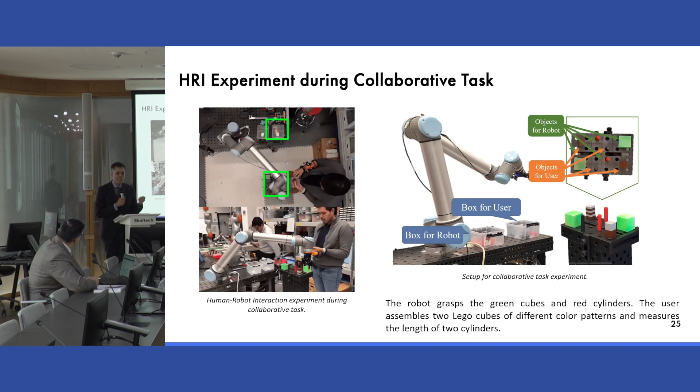So in this case, we achieve the minimal distance - the distance we keep from the robot - increased when we apply haptic feedback by 33.9%, and the time for the entire activity was reduced by 46.3%.

So here you can see in the first part, the robot is moving alone, without the presence of a user, so no collision avoidance activated. In the second part, we don't have haptic feedback, so the collision avoidance is activated in many parts of the operation, and the time of the operation increased by about 100%.

In the last part, we implemented the haptic feedback. When the activation of the collision avoidance algorithm started, the user was informed and could take their hand out. With this system, we achieved a decrease in time of 46.3%.

In the last chapter, we presented the conclusions of our work. The first is about haptic feedback. The first research question was how to improve the design and effectiveness of haptic interfaces for the user's palm during teleoperation. First, we developed a novel method to investigate the sensation rate on the user's palm during interaction with different surfaces, and developed the multi-contact wearable haptic interface for the palm, LinkGlide.

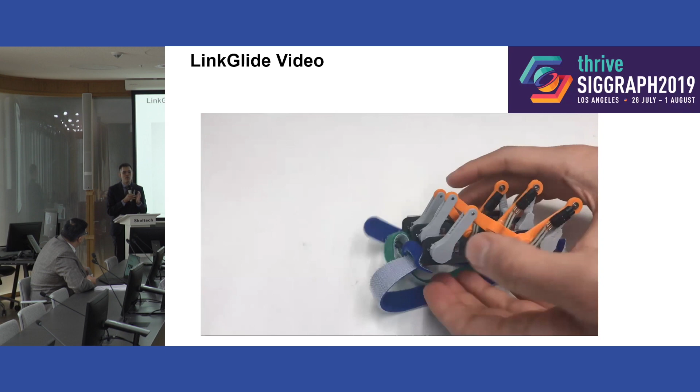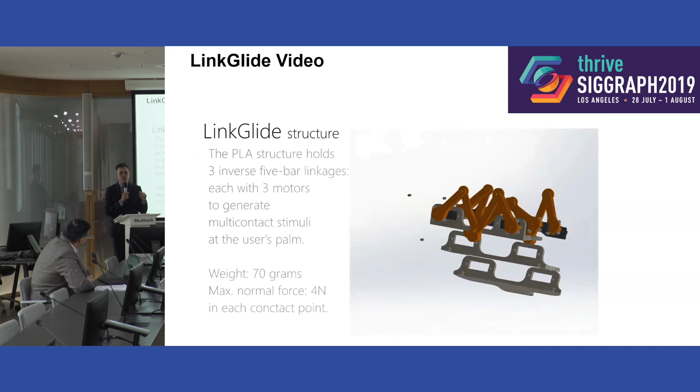Here is one version of the device that the user was wearing. The base is moving a bit to be more comfortable for the users to wear, and after these points give the sensation - in this work we were giving the sensation in virtual reality. So how the users can interact with different points in the palm, it can give the movement. These 3 points are sliding in the palm, giving different positions according to the movement of the servo motors.

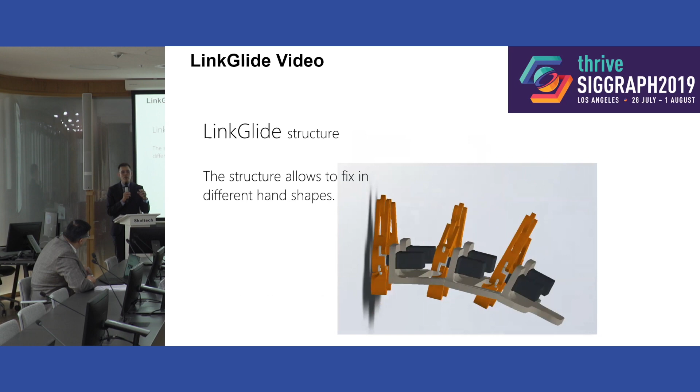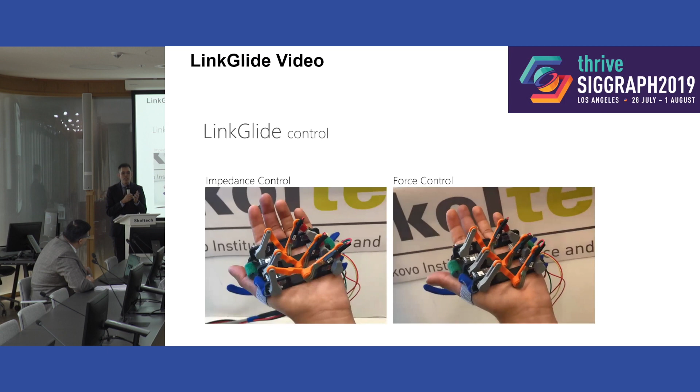I now get why you call it glide - it's not really 3 points, let's call it 3 bands. The point is, we can make these three contact points, and we can slide too, covering almost all the palm of the users. Here we can see how the points are moving to different locations.

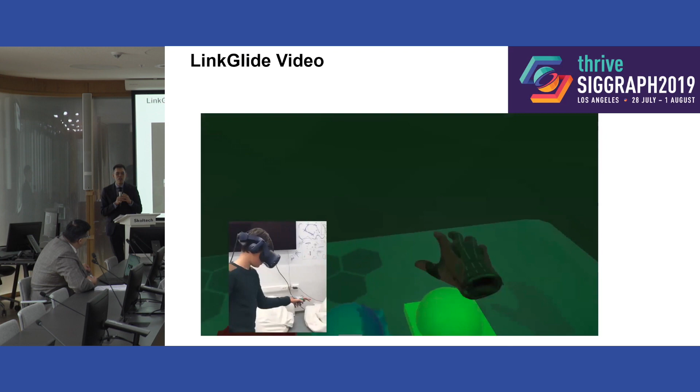Here, for example, in virtual reality, we implemented pressing different buttons, or feeling some animals in the palm, according to the interaction with the objects. So we can slide in the palm, we can give 3D movement, etc.

Okay, I now get it. To arrive at the final version, we designed and prototyped different versions of this system. We were making some with maybe more contact points, but the links were bigger. So we arrived at the final solution that is more optimal to have contact in more places with the lower space to cover in the device.

However, I agree with you - in future we should explore novel technologies to create new haptic devices, for example soft robotics that we can implement with more contact points in the palm to recreate sensations. I was honored to receive the best demonstration award with this device because it was very novel in this conference to present this multi-contact interface on the palm of the users. The exploration of this field is continuing - this device was very novel in that moment, presenting some novelty in the system.

Nice, nice. Oh well, thanks so much. Thank you. I have another question.

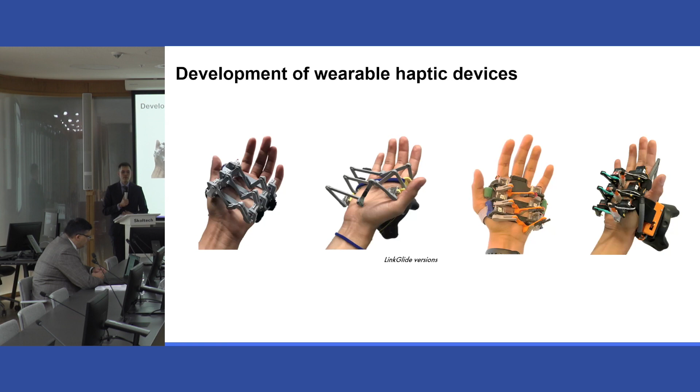Yes, so that's on the human side, which is somehow the focus of your work. On the robot side, there's also some display I presume some form of capacitive or resistive sensors. I think you showed some display you developed for the robot arm. Maybe I'm a visual person.

Let's go and see that one. This haptic interface too, right? Yes. So on the gripper, you use some standard commercial sensors. Yeah.

Actually, the sensors that we implement, this one, right? Are these commercial sensors? So is this something you developed?

No, it's actually because we had some collaboration with Professor Kajimoto Sensei. He is developing these sensors in his laboratory, and because of this collaboration, we received these sensors. They are not commercial, they are created by his laboratory in Japan.

Though it's not the focus of your work, these are the questions I have, so I still ask you. Give or take 2, 3 years, in the community there's been a lot of interest in this new type of tactile sensors, not based on this technology, but using vision. These optical tactile sensors are basically a calibrated camera with information. So my question is, have you considered using any of that? Would that improve in any sense your methods, your approach?

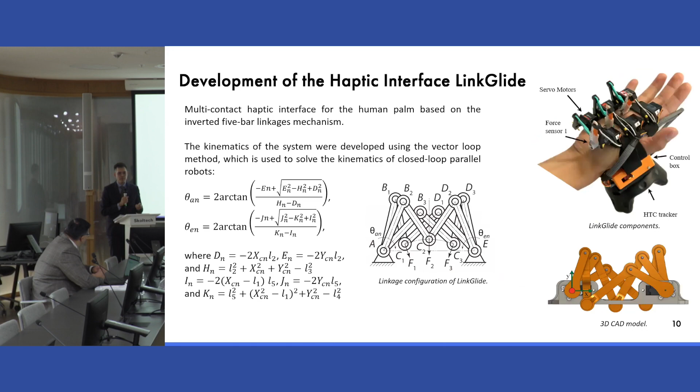For example, here's... So where is the haptic part here? In this part of the work, we didn't implement haptic feedback yet, but we are referring to the title of the thesis. Is there any? Yes.

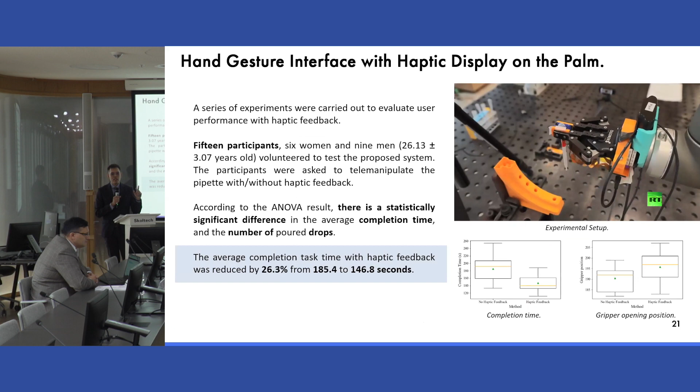In this video, another operator is using the Zoom meeting tool and wearing the haptic device on the left hand, receiving information from the perception of the object we are grasping. In this case, it's a pipette that we grasp to take liquid and then pour some drops in the environment. Here we use the gestures of the hand to give freedom of movement to the robot, together with specific locations we send to the robot to make the system more stable. So here, everything is Osama making this teleoperation.

So the interface, or at least the focus of your work, is more about clarifying questions. The part you contribute and focus on is, through this interface, identifying what we wish the robot to do. How the robot does it is not the focus of your work. So once it's like 'move there,' whatever 'there' means, for a robot it's actual numbers, and how it goes there, through what path, and with what other variables.

That's often found in developing teleoperation schemes. That part you didn't focus on. It's more on identifying the goal and what you want to do, and then if there's some contact, providing some feedback, right? Yes, exactly.

Okay, so it's not like here's my hand moving and you have a tracker, and then there's another robot there following my motion. So you don't do this? Yes, right.

In this part of the work, according to the gestures in the video, for example, if I put the gesture with one finger only, I announce to the robot to move in the XY position. According to the position of my hand on the screen, it's used like a joystick. So if you move to the left, the robot moves to the left. If you move to the right, the robot follows the hand to the right.